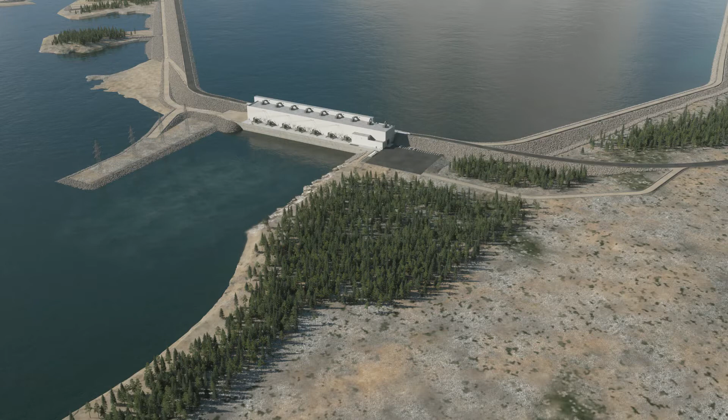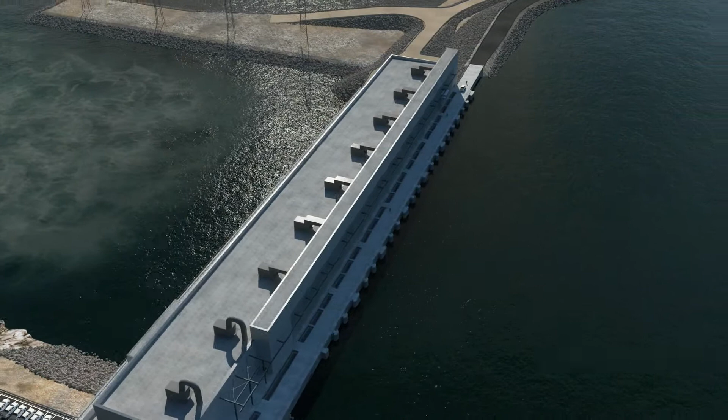The Keeyask Generating Station project is a collaborative effort between Manitoba Hydro and 4 Manitoba First Nations: the Fox Lake Cree Nation, Tataskweyak Cree Nation, War Lake First Nation, and York Factory First Nation, working together to form the Keeyask Hydropower Limited Partnership. The Dragados Canada Ledcor Bird Joint Venture is providing this visual presentation to further demonstrate its capability to construct the project and deliver the results required by Manitoba Hydro.

The joint venture will exceed Manitoba Hydro's expectations by completing the project in record time, accelerating the delivery date by an average of 4 months per unit. The Keeyask project consists of a hydroelectric generating station and related works, including 2 long riverbank dikes on the north and on the south, linked to the principal structures which span the Nelson River at Gull Rapids.

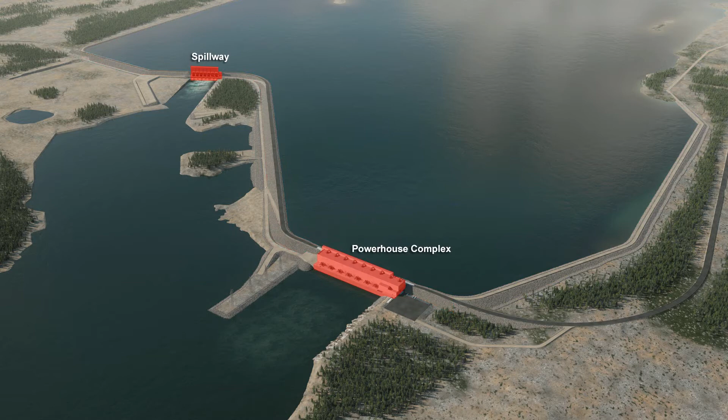The principal structures consist of a powerhouse complex constructed on the north side of the river, which will be connected to the North Dike. The spillway will be located on South Island. A central dam will connect the spillway and the powerhouse structures. The spillway will be connected to the South Dam by means of a short concrete transition structure.

General construction process. The proposed general construction process is based on a schedule starting on June 27, 2014 and finishing on December 14, 2019. Construction activities will include the commencement of the Stage 1 diversion through construction of the quarry cofferdam, discontinuing flow within the northern channel of the river, as well as the construction of the North Channel rock groin and the causeways to G3 and N5.

The construction of the North Channel Stage 1 cofferdam, construction of the Powerhouse Stage 1 cofferdam, the diversion of the entire flow of the Nelson River through the southern channel, and construction of the Stage 1 Island cofferdam. In order to take advantage of the 2015 summer window, the Central Dam Stage 1 cofferdam and rock groin will be built. At the beginning of the winter of 2014, excavation for the powerhouse will commence.

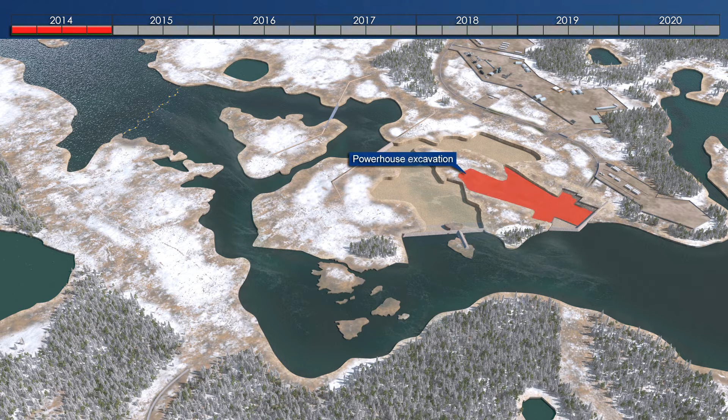The tailrace summer-level cofferdam will also be built in order to finalize all the excavations. During the summer window of 2015, the main body of the central dam will be constructed, leaving the connections with the transition walls for a later stage. In 2015, construction of the Spillway Stage 1 cofferdam will take place.

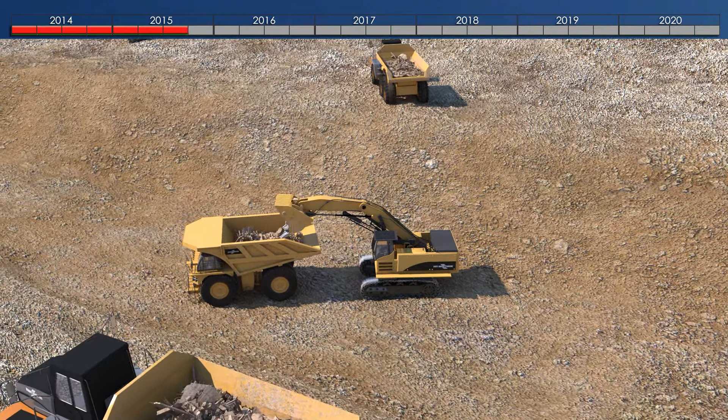The Stage 1 diversion will permit undertaking of the excavation works and construction of the principal structures. Throughout the Stage 1 diversion, the river will be confined to flowing through the southern channel of the Nelson River. Construction of the North Dike will start in 2015. Excavation and construction of the earth structures, including the North Dam, parking lot, and North Access Road ramp,

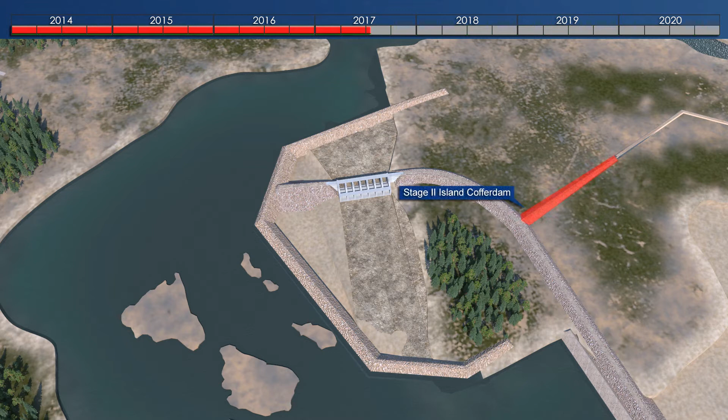will see the partial completion of the northern section of the South Dam prior to the Stage 2 diversion, and the full completion of all the other scheduled construction activities inside the Spillway Stage 1 cofferdam, as well as the construction of the Stage 2 Island cofferdam, and finally, the breaching and removal of portions of the Spillway Stage 1 cofferdam.

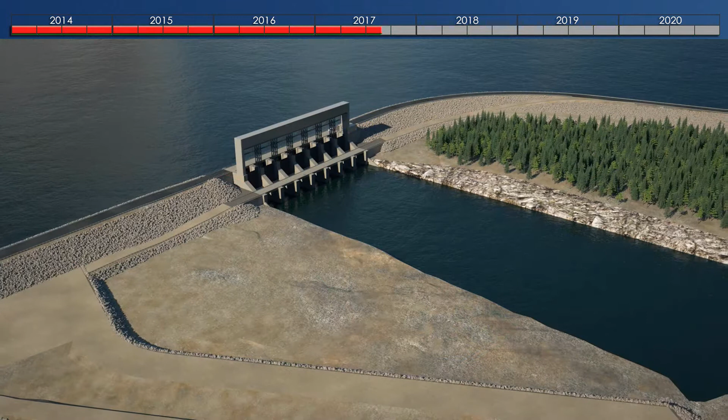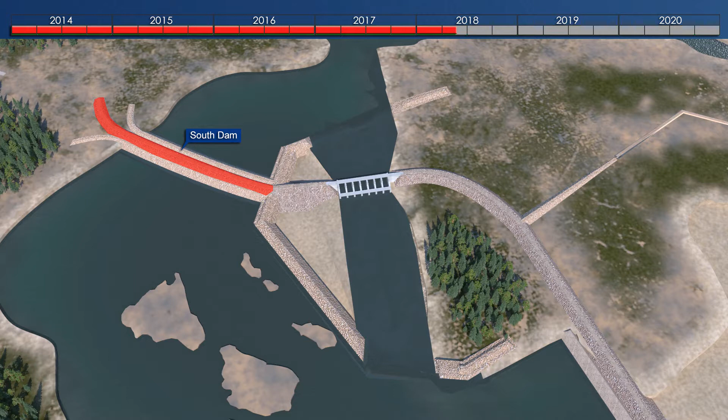Beginning of the Stage 2 diversion by closing the river channel with the advancement of the South Dam Stage 2 upstream cofferdam from the Stage 1 Spillway cofferdam to the south side of the river. It will also close the South River channel and direct flow into the open sluiceways through the spillway for diversion purposes. The Stage 2 diversion will allow construction of the South Dam, the South Dike, and access to the South Shore.

In the dry removal of the northern leg of the Powerhouse Stage 1 cofferdam will occur. The southern leg of the Stage 1 Powerhouse cofferdam will remain in place and form part of the transmission tower spur. Construction of the transmission tower spur. Completion of the scheduled construction activities inside the Stage 1 powerhouse cofferdam area, which are required to prepare the powerhouse for impoundment of the approach and tailrace channels.

Breaching and removal of the tailrace summer level cofferdam. Impoundment of the forebay in stages linked to closure and construction of the spillway rollways. And finally, closure of the remaining sections of the spillway. Commissioning of the turbines will take place on the following dates.

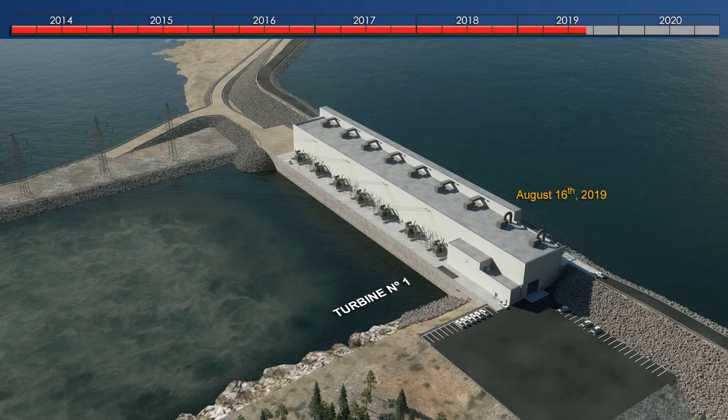Turbine number 1 will be commissioned on August 16, 2019. Turbine number 2 will be commissioned on September 21, 2019. Turbine number 3 will be commissioned on October 23, 2019. Turbine number 4 will be commissioned on November 6, 2019.

Turbine number 5 will be commissioned on January 8, 2020. Turbine number 6 will be commissioned on February 15, 2020. Turbine number 7 will be commissioned on May 2, 2020.

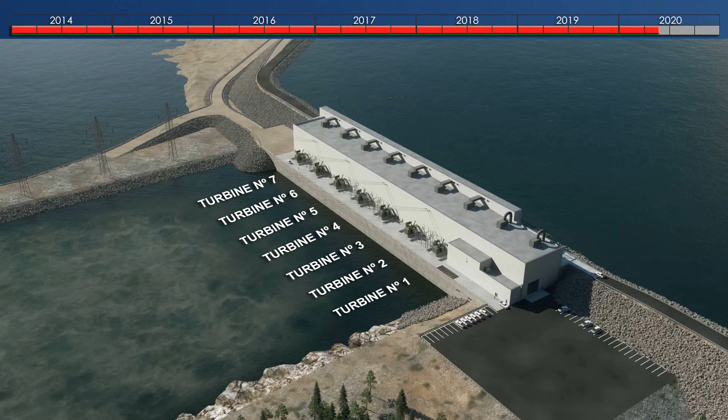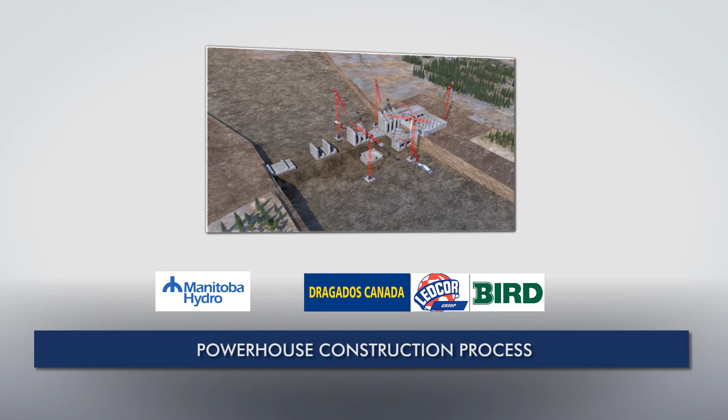Powerhouse construction process. The core methodology behind the construction of the powerhouse building will be to quickly erect the intake to its full elevation at 173.5 meters, as well as the lower block of the powerhouse to a level high enough to install the structural steel roofing on. This will be completed as early as possible within the time plan in order to enclose each unit, which will enable the work to continue under cover.

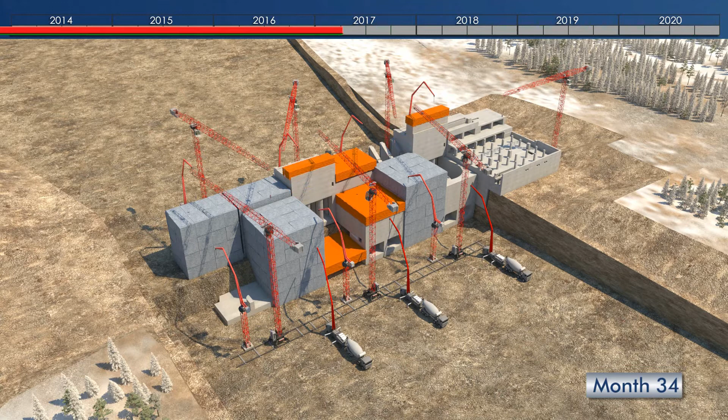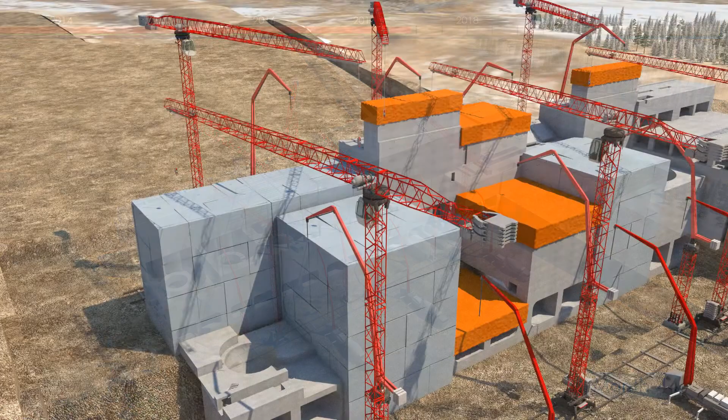A sheltered work area will facilitate work during the winter months and contribute to the schedule advancement. When the erection of any of the units occurs during the winter, hoarding will be used. Given the height and smaller size of these pours, only a winter hoarding consisting of insulated blankets will be used.

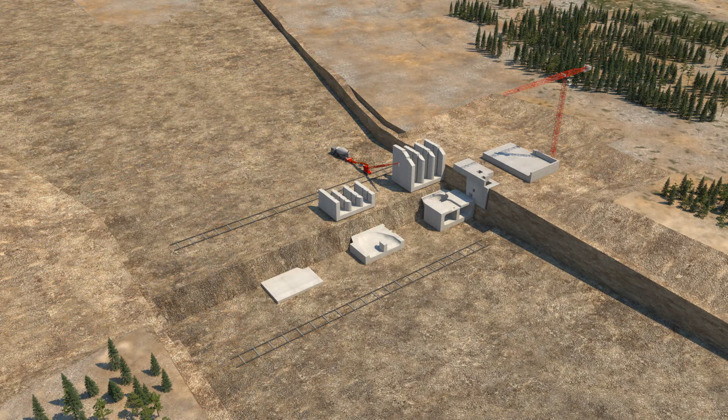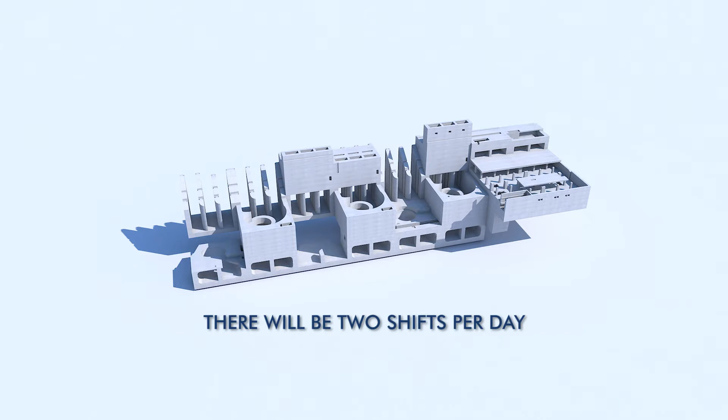The powerhouse blocks in Units 1, 3, and 5 will commence at the same time as the intake and the service bay units. To achieve this, there will be 2 shifts per day. Once the crews have completed Units 1, 3, and 5, they will be reassigned to the remaining units. Namely, the crew from Unit 1 will go to Unit 2 and then to Unit 7. The crew from Unit 3 will go to Unit 4. And the crew from Unit 5 will go to Unit 6.

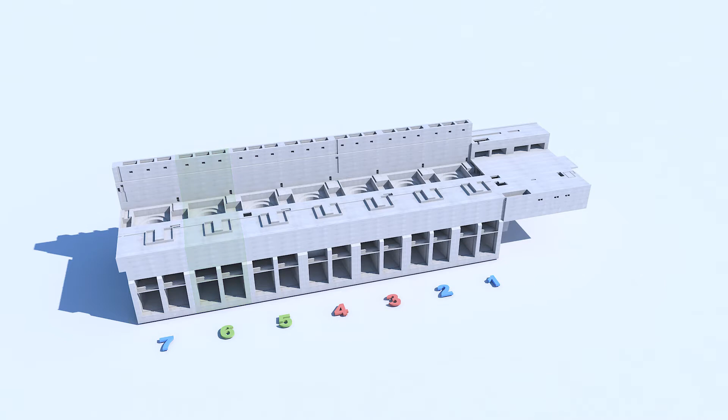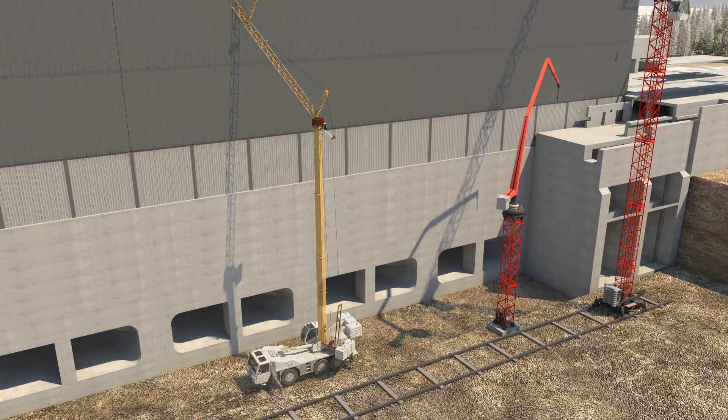The superstructures, or roof, for each unit are built in cascade from Units 1 to 7, as Manitoba Hydro requires them, in order to allow the use of the bridge cranes from the service bay to each unit. The erection of the tail race will be delayed until the structural steel has been placed and the associated crane has been moved out of this position.

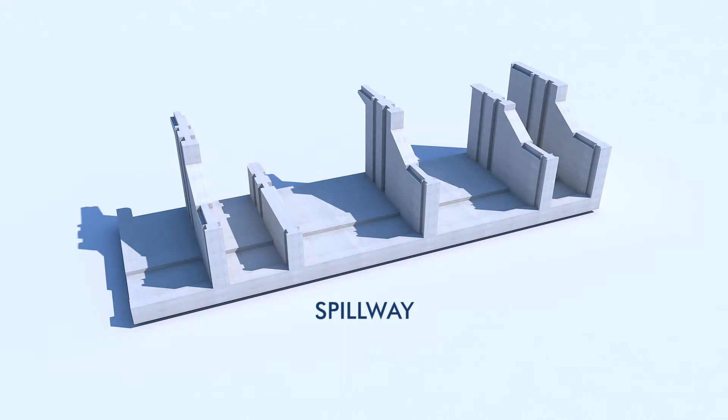Given that the roofs are placed late in the schedule, 4 crews will be used at certain points. No challenges related to the increased manpower need are expected at this point. Most of the crafts from the spillway and the intake will be completed by this time.

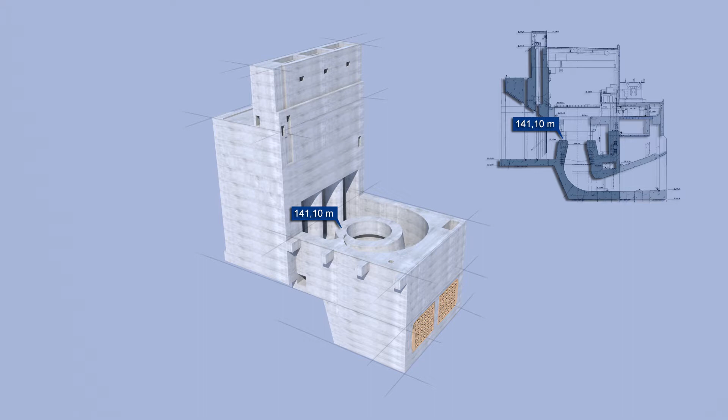Per unit construction plan. The joint venture will begin construction of IN and PH1. Work will stop on the powerhouse once the elevation of 141.1 meters is reached in the lower cone and 143.7 meters in the walls, where the steel structure is placed.

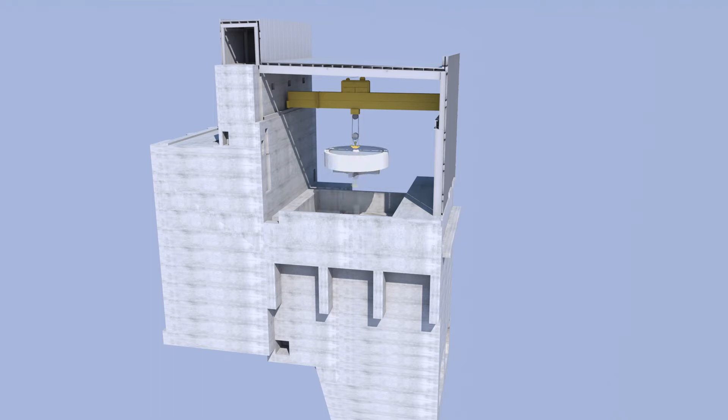Once IN and PH1 blocks are finished, the roof will be installed so that winter work may commence inside the covered area. The roof will allow the PH2 block to be completed indoors, including the concrete and mechanical elements. Once the roof structure is placed and the crane is moved away from the tail race position, the construction of the TR1 block will commence, and then the TR2 right after.

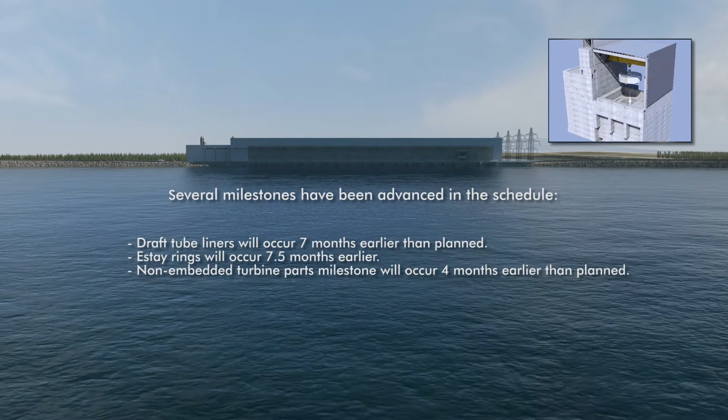As per the provided milestone plot, several milestones have been advanced in the schedule. The installation of the draft tube liners will occur 7 months earlier than planned in Manitoba Hydro's original schedule. The installation of the stay rings will occur 7.5 months earlier than originally planned. The plant ready for non-embedded turbine parts milestone will occur 4 months earlier than originally planned.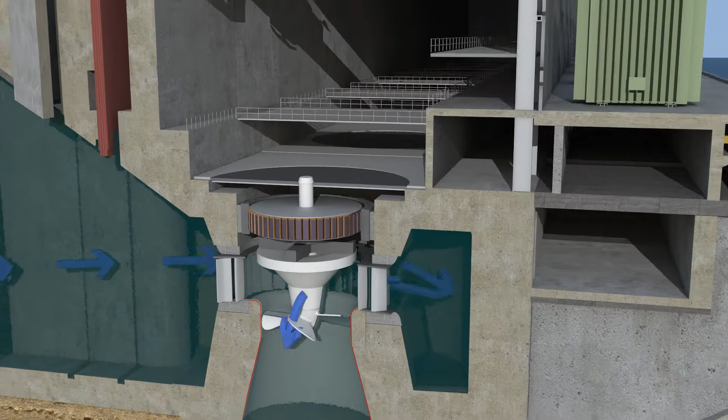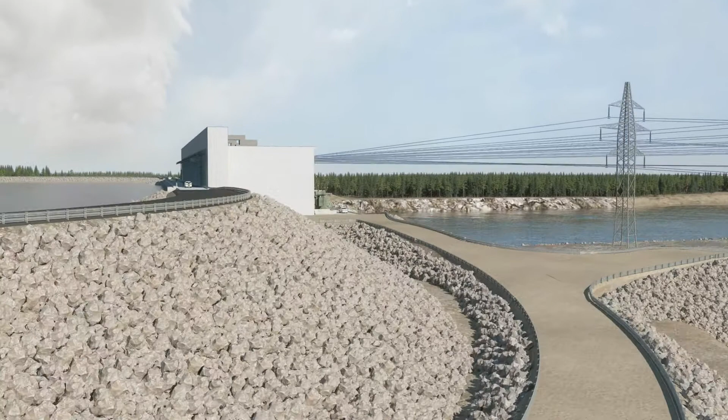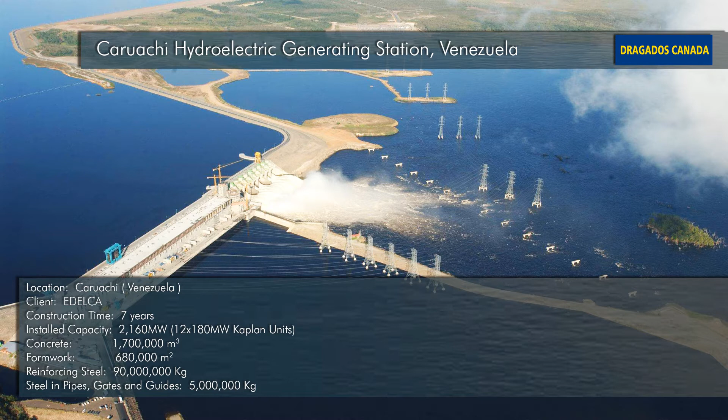Joint venture experiences on similar projects. Owing to the extensive experience and success on similar projects, the Dragados Canada Ledcor Bird joint venture is uniquely qualified to undertake such a challenge. Caruachi Hydroelectric Generating Station, Venezuela. La Breña Pumped Storage Project with Hydroelectric Power Plant, Spain.

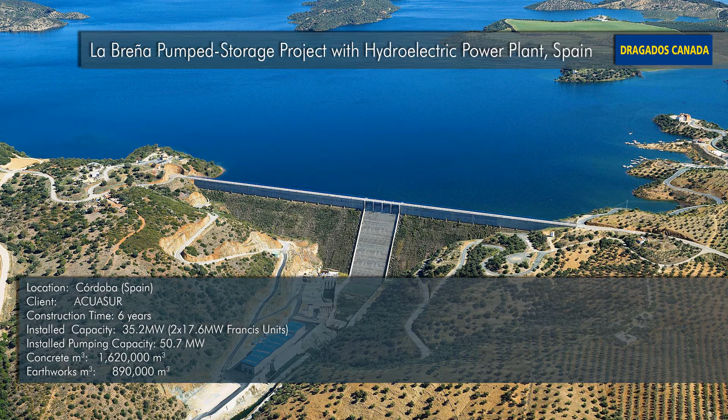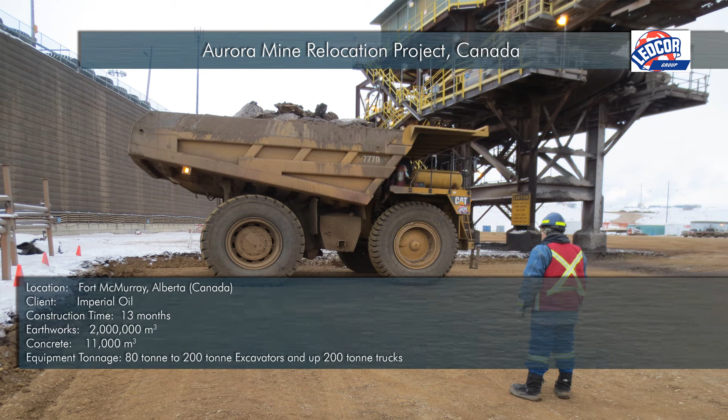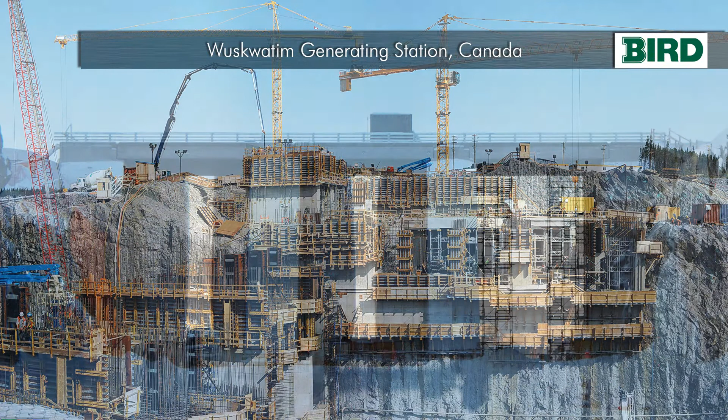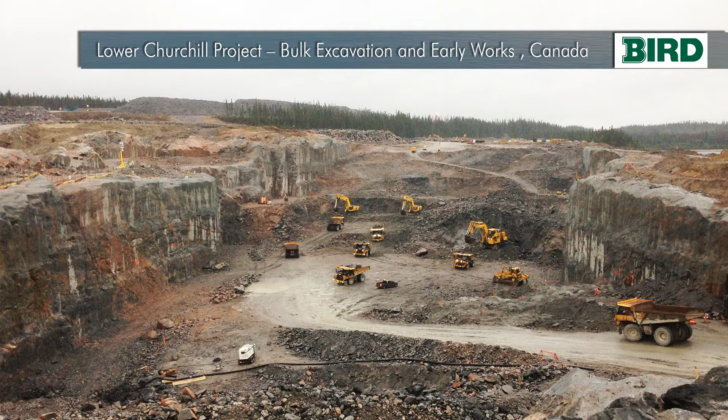Aurora Mine Relocation Project. Albian Sands Sand Cell 2 project. Wuskwatim Generating Station. Lower Churchill Project, Bulk Excavation and Early Works.

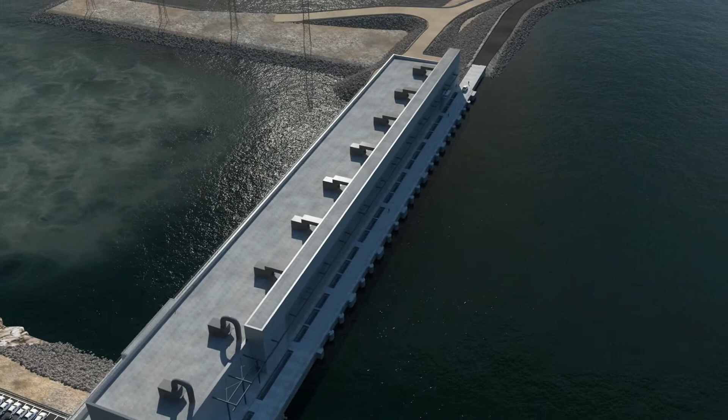Conclusion. The key to success for the Keeyask project will be the ability to work during the winter months, which will enable the original scheduled completion date to be advanced by around 4 months per unit. To achieve this goal, a detailed and comprehensive analysis of the schedule has been undertaken. The logic between construction of all project elements has been studied very carefully, optimizing the critical path.

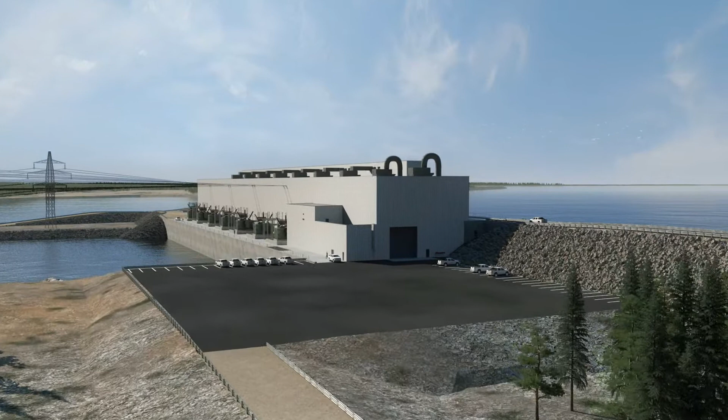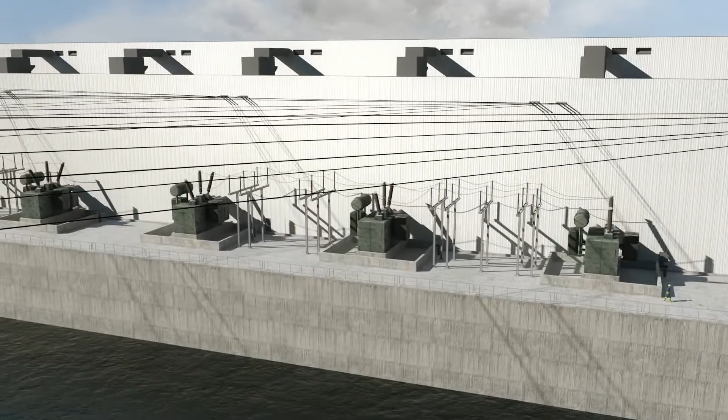The methodology and equipment demands have been developed and refined in order to maximize productivity and avoid any loss of time, which drastically shortens the schedule and saves significant costs. Finally, it's important to mention that special attention has been paid to minimize the environmental impact during the execution of the works.

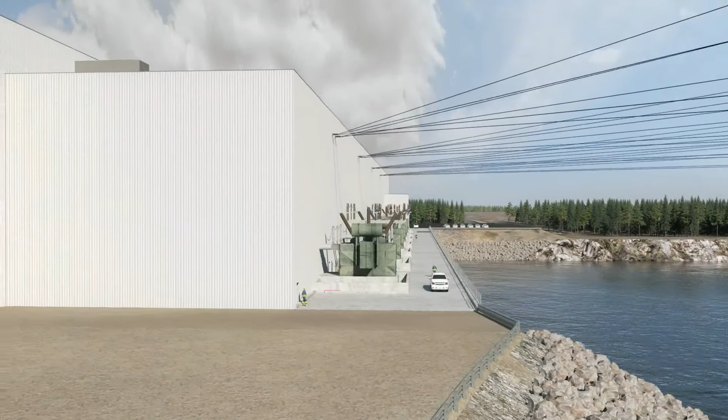The Dragados Canada Ledcor Bird joint venture is proud to assure Manitoba Hydro that its proven experience on similar projects and complete reliability in this field will ensure total success. The project will be constructed in record time and, most importantly, will enable Manitoba Hydro to produce and sell energy 4 months earlier than planned.